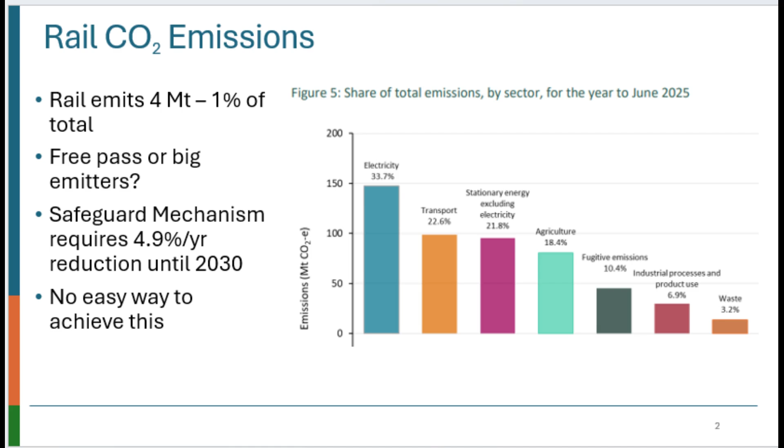It doesn't. Rail operators with large diesel fleets are identified as big polluters under the Safeguard Mechanism and must reduce emissions by 4.9% per year. There is currently no technology available to do this, so they are forced to buy carbon credits instead.

Outside our major cities, rail is powered by diesel, and there are around 2,200 locomotives and 250 diesel multiple units in operation. Diesels have long lives, and were it not for environmental legislation, most of the current fleet would still be in operation in 2050.

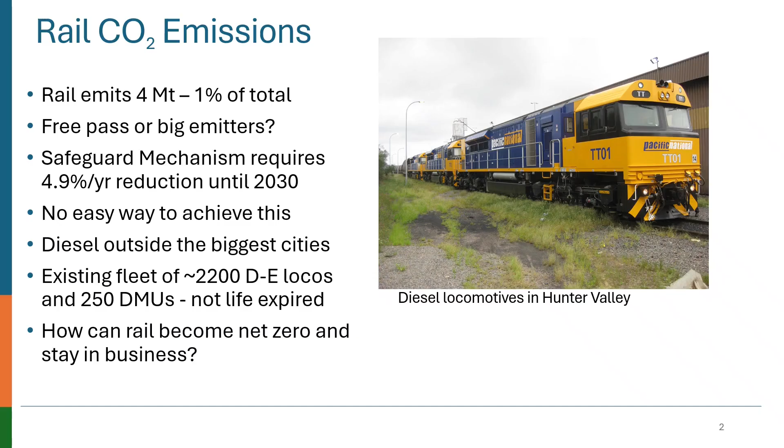So how can operators become net zero and still stay in business? We could electrify everything. Australia has around 41,000 kilometres of track, of which around 3,400 kilometres are electrified. To electrify the remainder might cost around $190 billion at $5 million per kilometre.

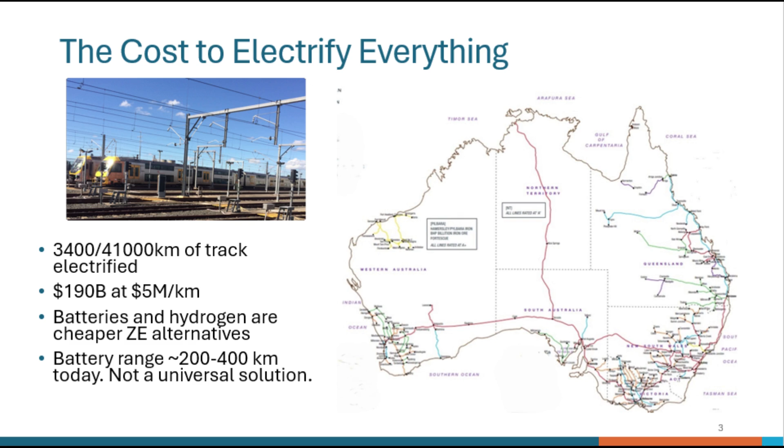Batteries and hydrogen have been proposed as cheaper ways to electrify. Currently, the operating range of battery-operated trains is limited to around 200 kilometres without charging, which is not enough for most routes. Batteries may be the solution for ore trains in the Pilbara, where the mines are around this distance from the port.

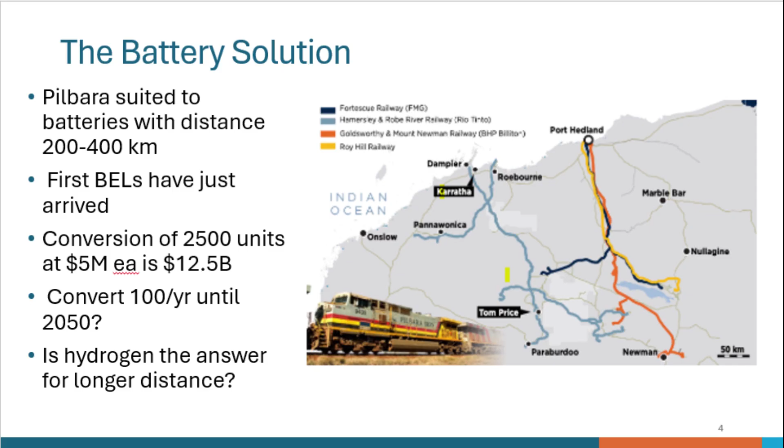Being predominantly downhill in the loaded direction, regenerative braking can supply a lot of the energy. Even so, the first prototype BELs have only just been delivered to Port Hedland, and it will be some time before they are hauling iron ore.

Even if batteries were the solution, to get to net zero by 2050 would require replacing or converting 100 locos per year at a cost of perhaps $5 million each, or $12.5 billion in total. But for now, batteries are only suitable for shorter distances.

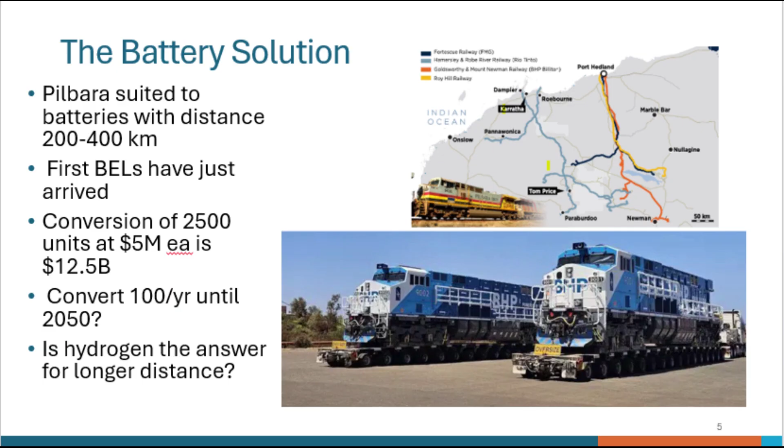Is hydrogen the solution for the longer routes? Fuel cell-powered trains have been in service in Germany since 2019, with several small fleets of Alstom iLints on regional services. Pictured is a refuelling station for a fleet of 12 two-car sets.

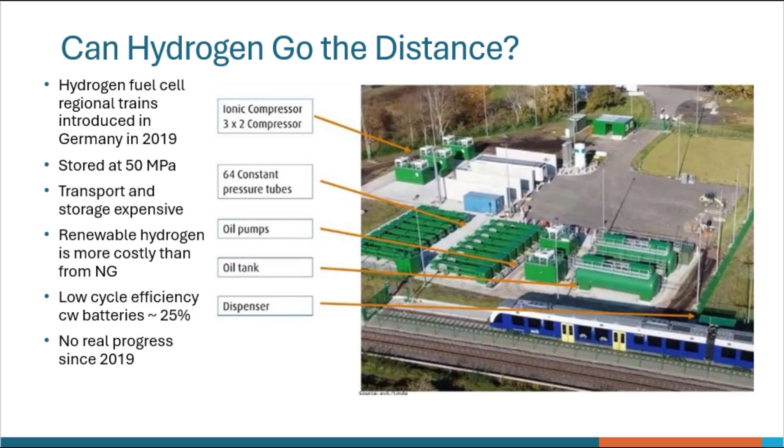The hydrogen is brought in by truck from a chemical plant 35 kilometres away and stored at 50 megapascals. This is a very expensive process. Renewable hydrogen is even more costly and has a cycle efficiency of only around 25%. There has been no progress since 2019.

Fuel cell cars are dead in the water. Toyota started developing the Mirai and Hyundai the Nexo more than a decade ago, when nobody thought batteries could ever have enough range to replace petrol.

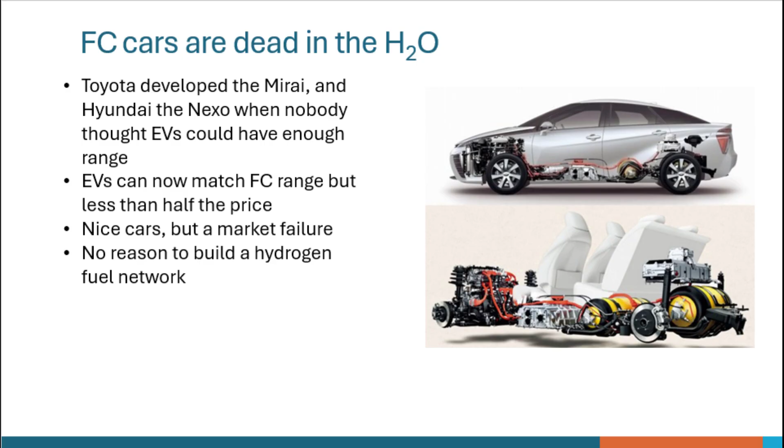But now EVs can match fuel cell range, but at less than half the price. These are nice cars, but a market failure. Therefore, there is no reason to build a hydrogen fuel network.

Some manufacturers think fuel cell trucks are not dead yet and are still developing them. If they were to succeed, it would be necessary to develop the fuel network to supply them, and rail could piggyback off this network. But it is chicken and egg. Without demand, no one will develop the network, and the price will remain exorbitant.

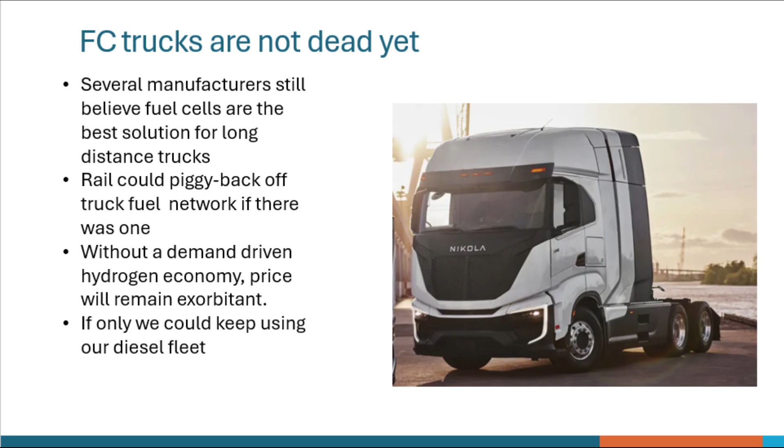If only we could keep using our diesel fleet. What we really want is a drop-in zero-emission replacement fuel which would require no modifications to existing locos.

Vegetable oils do not burn cleanly and will rapidly coke up a diesel engine, but can be converted to biodiesel, or fatty acid methyl esters, which have been around for decades. It is easy to make FAME by heating vegetable oil with methanol, which breaks the triglyceride molecule into 3 chains. This can be done in a pot on a kitchen stove.

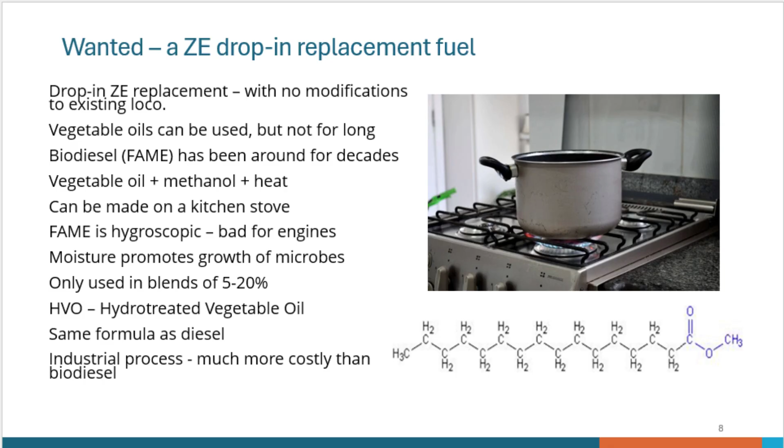These methyl ester molecules are very similar to diesel, but have 2 oxygen atoms near the end of the chain, as in the diagram. Oil and water don't mix, but these oxygen atoms make esters hygroscopic, and they will hold water in suspension, which is bad for engines. Moisture promotes the growth of microbes and sludge if biodiesel is stored for any period of time. Therefore, most engine manufacturers will only allow blends of 5 to 20%, and pure biodiesel is rarely used.

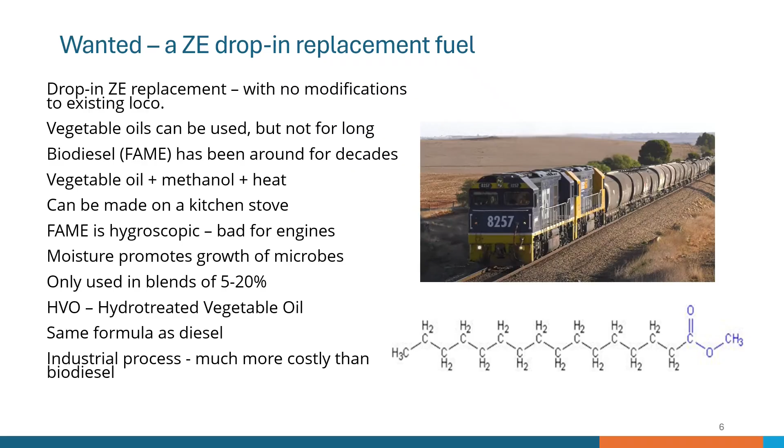HVO, or hydrotreated vegetable oil, overcomes this problem by removing these oxygen atoms and replacing them with hydrogen to produce hydrocarbon molecules exactly like diesel. This requires using heat and high pressure in an industrial process which is much more costly than making biodiesel.

However, both biodiesel and HVO have a problem. They are always promoted as having been made from waste cooking oil, but we don't eat enough fried food to generate enough waste oil. There have been a number of scandals in Europe where virgin palm oil, labelled as waste, was imported from Asia. In Australia, rail consumes around 1,700 million litres of diesel annually, and it would require about 4.5 million tonnes of grain to make this much oil.

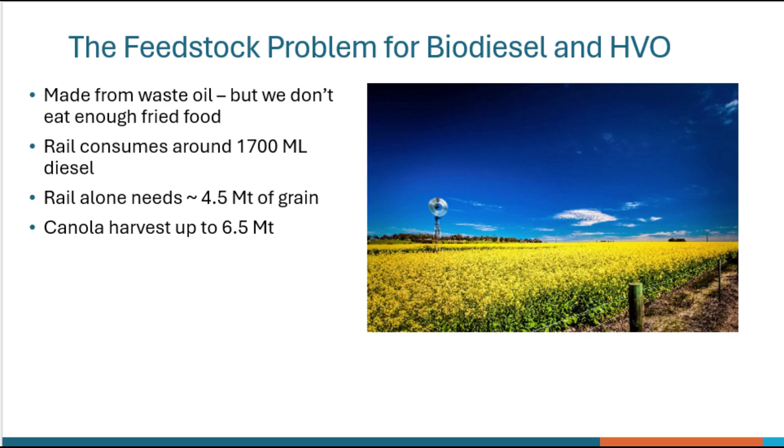The 2025 canola harvest in Australia was about 6.5 million tonnes, or about 10% of all grain production. While sufficient for rail, road and aviation would also be competing, requiring 20 times as much, or more than Australia's total grain production. There is no possibility that fuel could displace food production. This is truly a dead end.

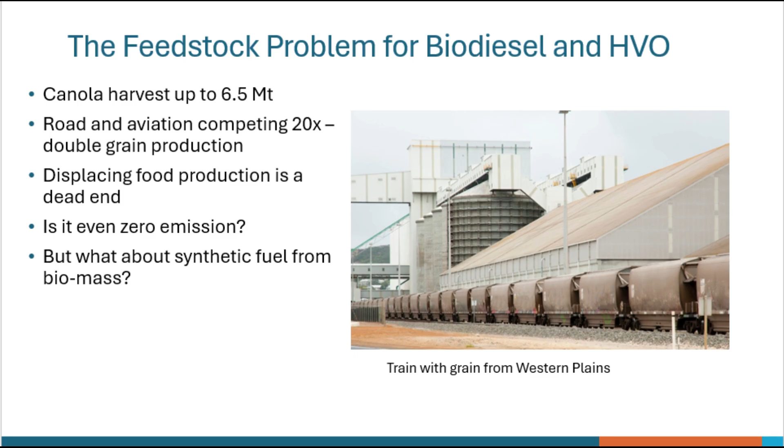It is even questionable whether oil from grain is truly zero emission, since nitrate fertilisers require ammonia, which is currently made with hydrogen from natural gas. But what about synthetic fuel from biomass?

Any hydrocarbon can be made using the Fischer-Tropsch process, which was invented in the 1920s and allowed Germany to make liquid fuels from coal during World War II. South Africa did the same when it was under sanctions during the apartheid era. Like HVO, the molecules are the same as in fossil diesel fuel.

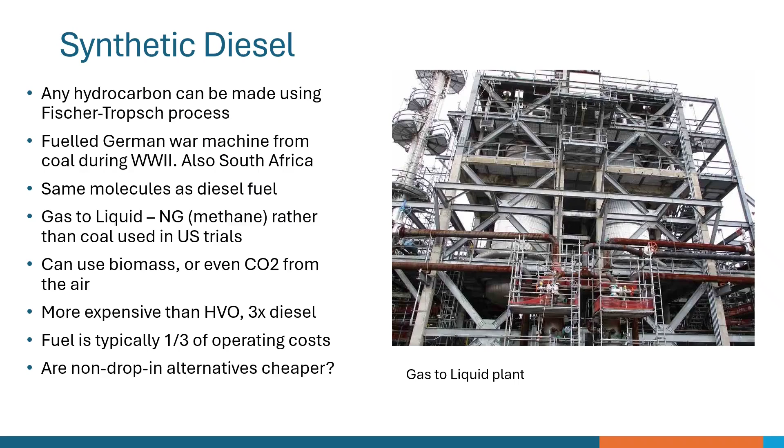There have been several gas-to-liquid projects in the USA using natural gas or methane rather than coal, as pictured here. To make a net zero fuel, biomass could be used, or even CO2 extracted from the air, but this is more expensive than HVO and at least 3 times the cost of regular diesel. Fuel is typically a third of the operating cost for freight operators, so a 3 times cost increase would be an almost impossible burden.

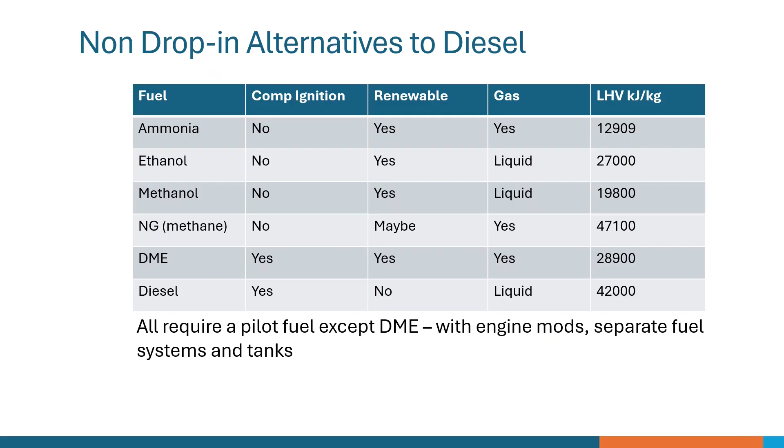The first, ammonia, is the only true zero carbon fuel, being a compound of nitrogen and hydrogen. However, ammonia is currently made from natural gas using the Haber-Bosch process, resulting in 2.6 kilograms of CO2 for every 1 kilogram of ammonia produced, about the same as burning a litre of diesel. Green ammonia uses hydrogen produced by electrolysis, which currently costs a great deal more than when made from natural gas. Nevertheless, there is great interest in ammonia as a zero-emission fuel for shipping, and several manufacturers have produced engines capable of running on ammonia.

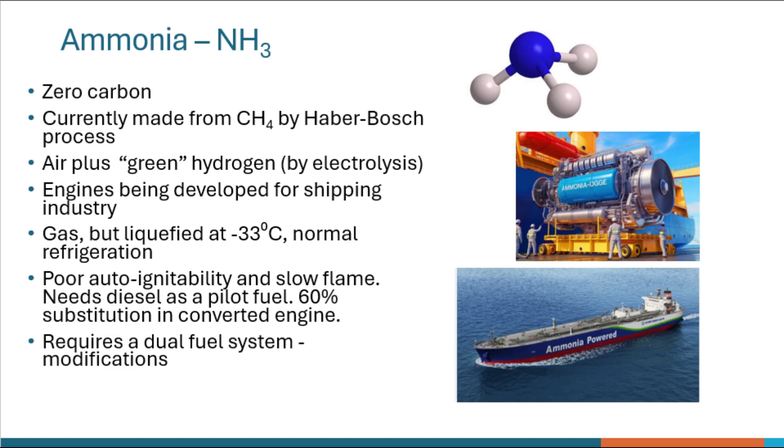But there are several disadvantages. Ammonia is a gas at ambient temperature, however it can be liquefied at minus 33 degrees C, a temperature within the range of conventional refrigeration. Ammonia has poor auto-ignitability and slow flame speed. It generally needs diesel as a pilot fuel, and not just a little. In a converted engine, you may achieve 60% substitution of diesel, although this can be higher with specially designed combustion chambers. It therefore requires a dual fuel system, with modifications to the engine.

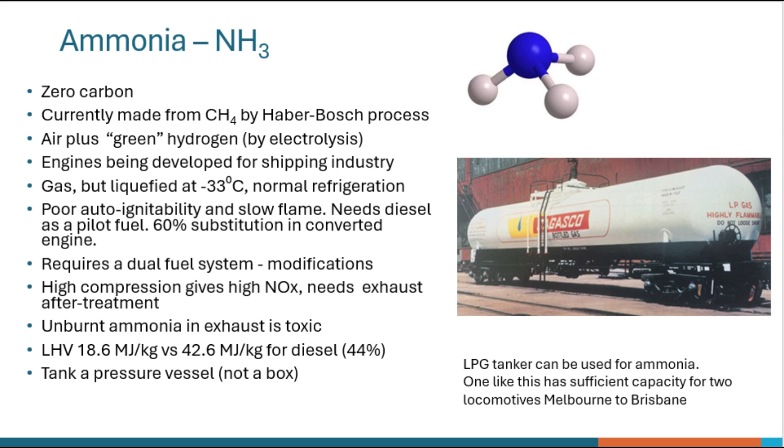High compression improves combustion, but also gives high NOx, so exhaust aftertreatment is required, adding to the complexity of conversion. Low compression will lead to unburnt ammonia in the exhaust, which is toxic, and the energy is less than diesel, 44% by mass and 37% by volume. It needs to be stored in a pressure vessel rather than a tank, so range with onboard storage will be less. For longer routes, an external tanker would be necessary. Tankers designed for LPG can be used for ammonia, and one like this would be adequate to provide fuel for 2 locos on a train running from Melbourne to Brisbane.

Methane, or natural gas, is included here because it is considered as a transition fuel. There was a great deal of interest in natural gas in the USA when the fracking boom started, as in terms of energy, the price was about 20% of diesel. Both EMD and GE did significant development work, and there were trials with several Class 1 railroads. However, there are significant operational difficulties, and in the end, only Florida East Coast and one Mexican railroad adopted it for regular operations.

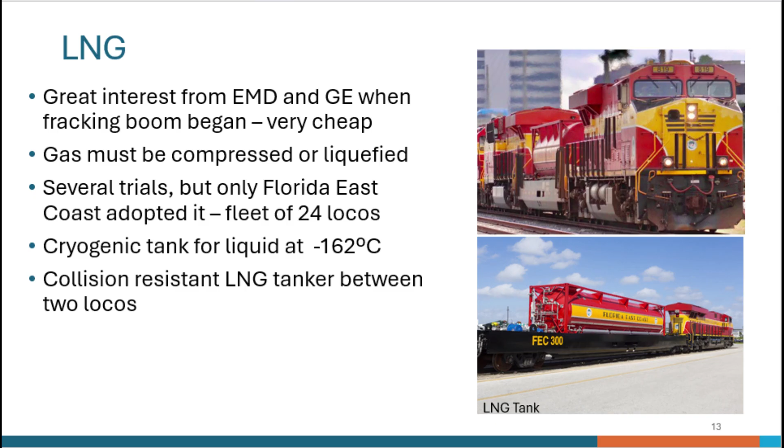Being a gas, methane must be either highly compressed or liquefied for storage. The liquid temperature is minus 162 degrees C, which requires a double-walled cryogenic storage vessel. Florida East Coast developed a special crash-resistant tanker wagon, as there are significant concerns about side impacts at level crossings. The wagon sits between 2 locos, and there are hoses between the vehicles transferring water from the locomotive radiators to heat exchangers on the wagons, where the LNG is vaporised and then transferred through hoses to the locos.

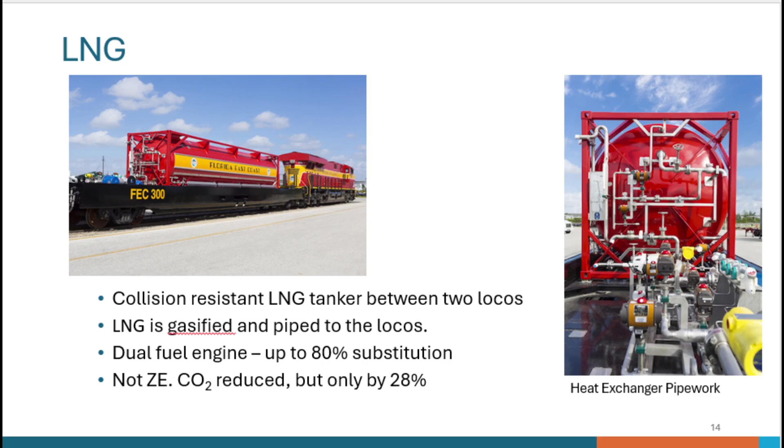Diesel is still required as a pilot fuel to ignite the methane, but around 80% substitution is achieved. Natural gas is a fossil fuel, and CO2 is only reduced by about 28% relative to diesel. Methane could be produced from biomass, but this is probably not the easiest or cheapest path to net zero.

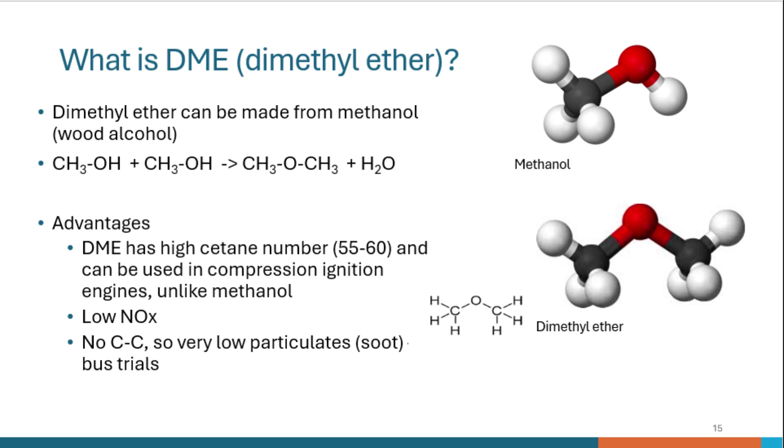Which brings us to DME, or dimethyl ether, which can easily be made by joining 2 molecules of methanol. Its key advantage is that of all the alternative fuels listed on the earlier slide, it is the only one which will ignite in a compression ignition engine. Its cetane number is even higher than diesel. Other advantages are that it produces less NOx and almost no particulates or soot. Because of this, there was some interest in DME as a clean fuel for urban buses about 2 decades ago, before all the focus turned to CO2 emissions.

However, it does have some disadvantages. The chief is that as a gas, it has a boiling point at minus 25 degrees C. In this respect, it is similar to LPG or propane. However, it remains liquid at 20 degrees with a pressure of 500 kilopascals, which is a pressure we are used to working with on rail for air brakes. It requires conventional pressure equipment, unlike methane or hydrogen. It is like barbecue fuel versus rocket fuel.

Pressures of 35 to 70 megapascals are used for hydrogen, or it is liquid at 20 degrees above absolute zero. However, another problem is its low viscosity, less than 10% of diesel. Pumps and injectors wear out faster, and therefore it needs an added lubricant or different injectors. Energy is lower than diesel, 28.9 versus 42 megajoules per kilogram.

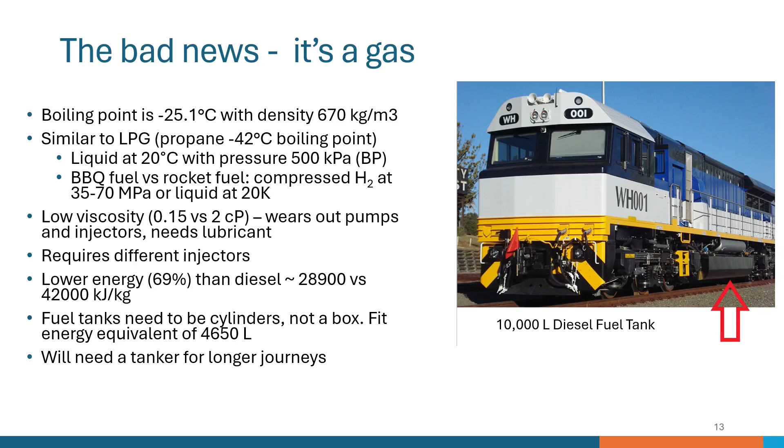Fuel tanks need to be cylinders, not a rectangular box as on this loco. Cylinders fitted in the space of a 10,000 litre diesel fuel tank would hold the equivalent energy of 4,650 litres. While this would be sufficient for intrastate work, a tanker would be needed for longer journeys.

DME is generally made from methanol, which can be made from wood or other biomass. Heating wood gives synthesis gas, a mixture of carbon monoxide, hydrogen, CO2 and some methane. As produced, syngas generally has 50% more carbon monoxide than hydrogen, but to make methanol requires a 2-to-1 ratio of hydrogen to carbon monoxide. The water gas shift reaction is used to boost the proportion of hydrogen by injecting high-pressure steam into the mix.

This step could be avoided by using green hydrogen produced by electrolysis, reducing the amount of CO2 and the amount of biomass required. However, it is currently more expensive than water shift.

To produce DME equivalent to rail's annual 1,700 million litre diesel consumption would require 10 million tonnes of biomass, assuming methanol produced with water shift. Australia exported 12.3 million tonnes of wood chips in 2022, but bagasse from cane is around 5 million tonnes, so the quantity needed is not outlandish.

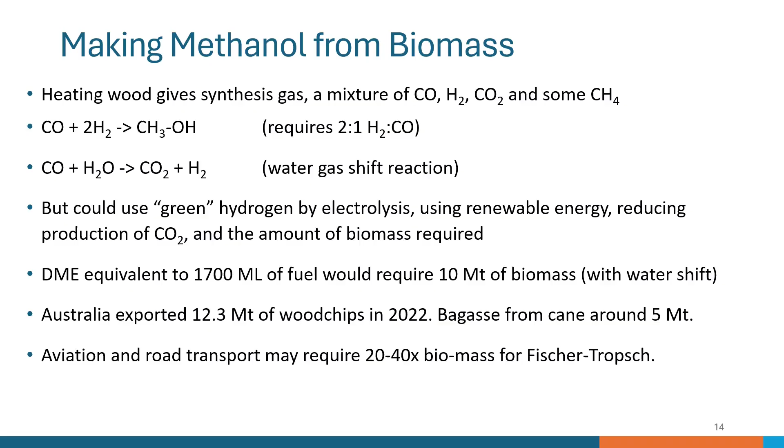However, rail may be competing with aviation and road transport. They would require 20 to 40 times more biomass than rail if they go down the Fischer-Tropsch synthetic fuel path. Which raises an important question: is fuel from biomass really net zero?

CO2 is released when you burn DME or any synthetic fuel or wood, and the process of making methanol also releases a lot of CO2. But to put this into perspective, it is estimated 830 million tonnes of CO2 was released by the bushfires of 2019-2020. However, because of regrowth, the CO2 released from burning wood is not counted. Australia's official CO2 for 2019-20 was only 528 million tonnes.

Some might argue that rather than wait for the bush to catch fire, causing massive destruction and killing millions of marsupials in the process, we could selectively harvest our native forests. But I won't even mention that.

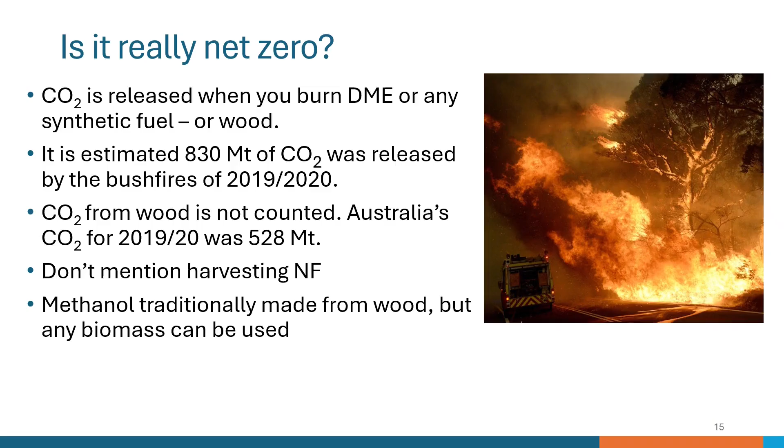Nevertheless, the argument stands that if there is regrowth, burning methanol made from wood or any other biomass is net zero. Methanol itself can be used in a diesel engine with a pilot fuel, and is also the subject of a lot of R&D for ship engines because it is easier to use than ammonia.

It would still be net zero if the pilot fuel is HVO or synthetic diesel, or even DME. This might be an economical combination, with methanol as the bulk fuel and the more expensive pilot fuel in smaller quantities. Being a liquid, methanol is easier to store and transport than DME as a pressure vessel is not required.

There may even be an argument for making DME at the point of use, from methanol made near the source of biomass. While its energy by volume is 82% of DME, methanol comes out slightly better even for onboard storage, as it can use a rectangular tank versus cylinders.

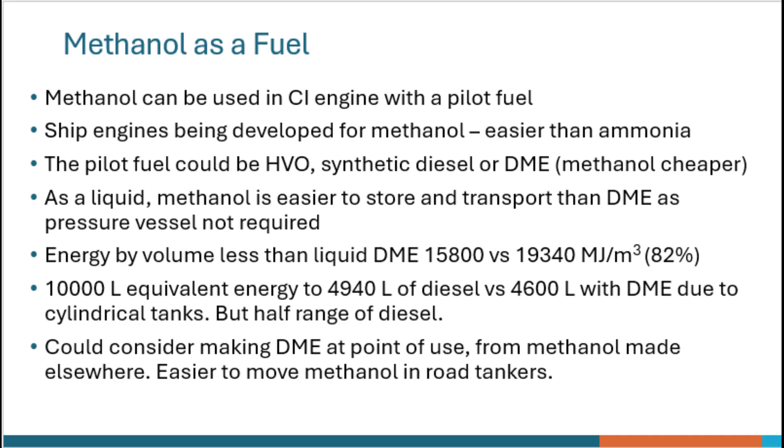Therefore, a 10,000 litre tank of methanol has energy equivalent to 4,900 litres of diesel, giving about half the range, and again would need an external tank for longer routes.

Assuming batteries and electrification replace half the fleet, for the remainder we would need 1.3 million tonnes a year of methanol. Australia had a methanol plant in Laverton, but it closed in 2016 due to the rising price of natural gas. However, ABEL Energy is proposing to build a 300,000 tonne a year green methanol plant in Bell Bay, Tasmania, to supply fuel for shipping made from biomass and green hydrogen.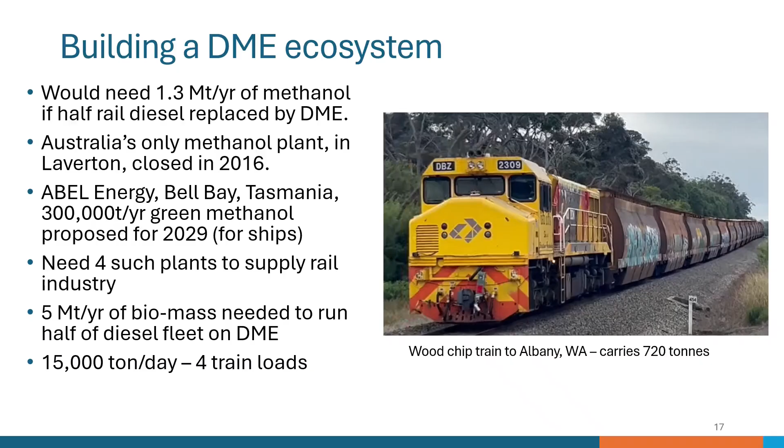We would need 4 such plants to supply the rail industry's needs. 5 million tonnes a year of biomass would be needed to run half the diesel fleet on DME. This equates to around 15,000 tonnes per day, or about 4 trainloads of biomass.

In conclusion, it would be possible to make diesels net zero with DME. The pros for DME or methanol are: it is net zero, carbon neutral if made from biomass. It could use existing locos with some modifications to injectors, pumps and tanks. It is much easier to store and transport and handle than liquid or compressed hydrogen. And it is cheaper than hydrogen or synthetic diesel, but nevertheless will cost more than diesel.

Is it a viable path for the Australian industry? Rail demand is sufficient for an independent DME ecosystem, irrespective of what other modes of transport do, which is not the case for hydrogen. This ecosystem requires methanol production, sources of biomass, and rail links to the production facilities. If we choose this path, it could be up and running by the early 2030s and carry us through to the mid-2040s when maybe other technology will be available.

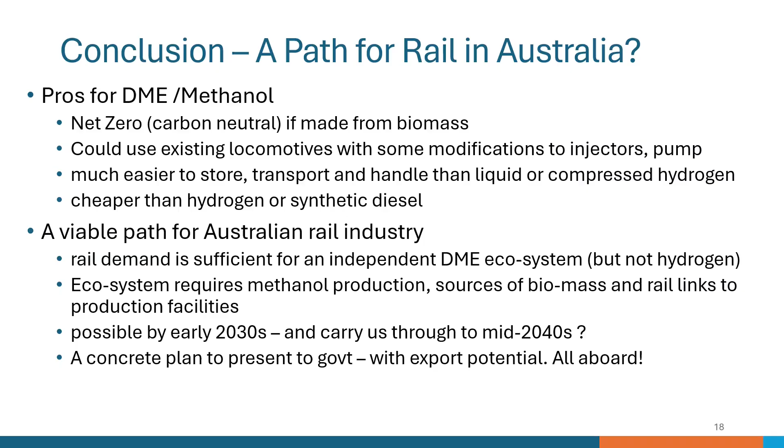This could be a concrete plan to present to government as an alternative to buying carbon credits, and it could have export potential if other countries follow our lead. So, don't send your diesel to the scrapyard just yet.